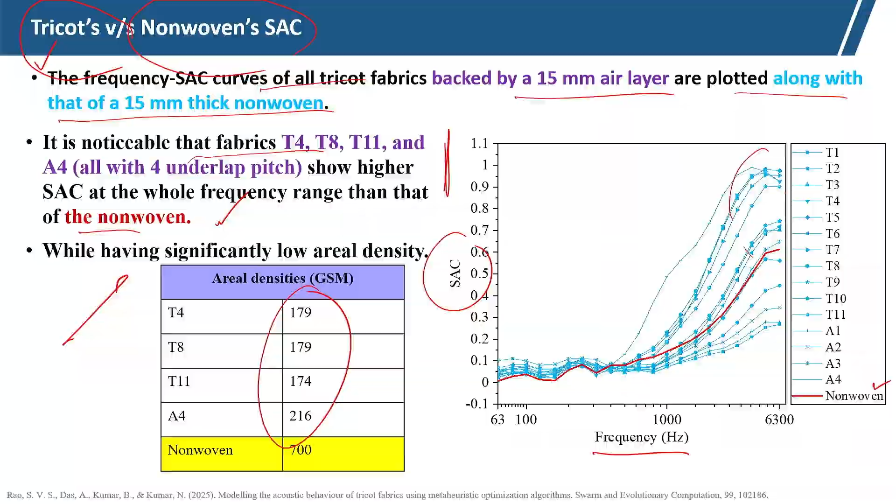Now, we are going to discuss one method which we have developed, and this instrument has been patented, which measures the acoustic behavior under real life situations. Normal measurement is done by the impedance tube method under laboratory conditions, but in real applications, industrial applications, automotive applications, sound absorption is required at high temperature and also under vibrating conditions. As we know, sound transmission is affected by temperature variation. So, this instrument will simulate the real life situation.

So, the limitation of the reverberant field method from an automotive perspective is that it requires a large sample, several square meters, which is impractical for many automotive components. Because in automotive components we need a smaller sample, but in the reverberant method we need a large sample, so that does not simulate the real life situation.

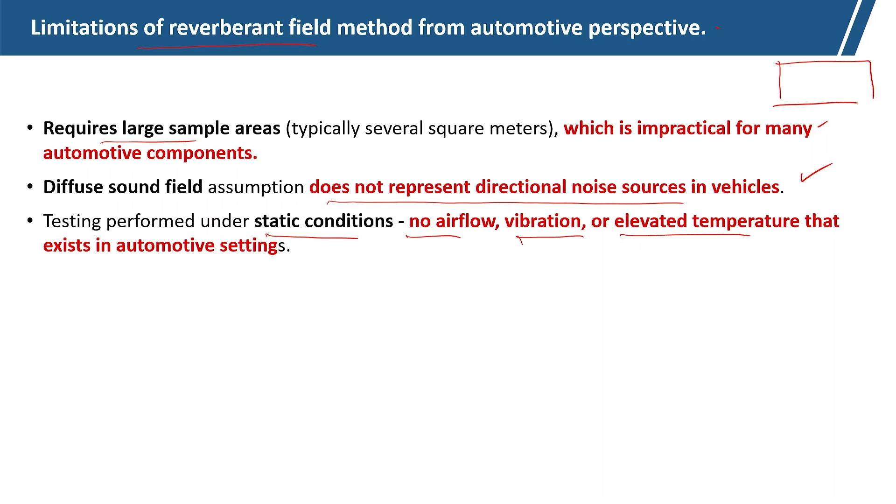The diffused sound field assumption does not represent the directional noise source in the vehicle. So, whatever sound source is there does not simulate the sound generated in the vehicle. Testing is performed under static conditions, with no airflow, no vibration, and normal temperature. In actual conditions, hot air flow will be there, vibration will be there, and the temperature will be very high, which exists in automotive settings.

And in the reverberant method, the flat mounting configuration is not suitable for duct-like automotive structures. Edge mounting or backing conditions can significantly influence the result. So, this reverberant technique, which is normally used for automotive acoustics, may not be suitable for specific applications, and it requires large facilities and high operational cost, limiting rapid material screening. So, if we want to test quickly, that is not possible.

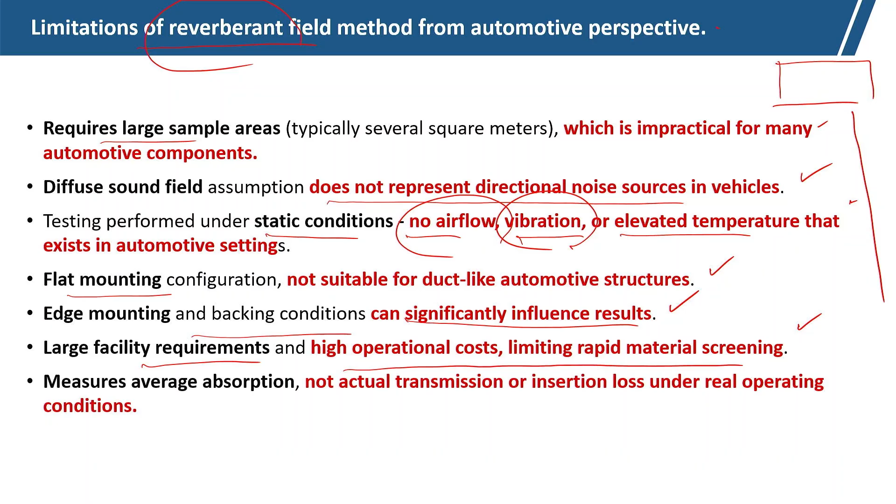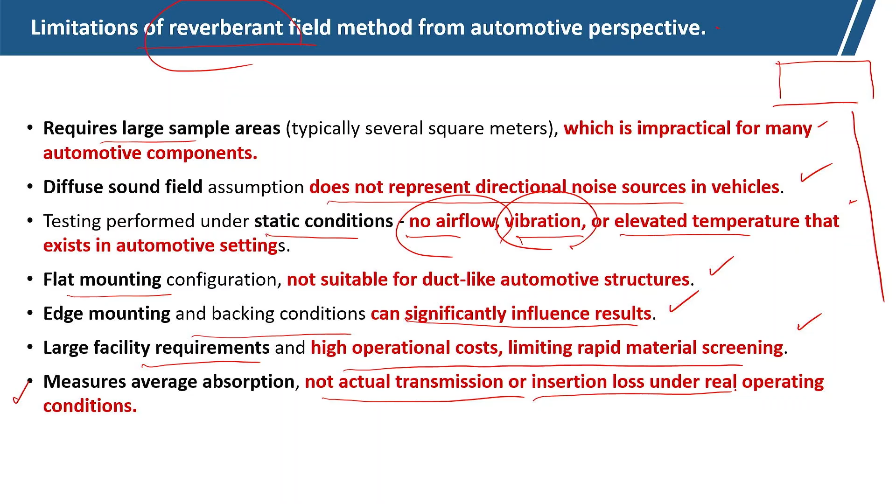The reverberant method measures the average absorption, not the actual transmission or insertion loss under simulated real operating conditions. So, combined acoustic and vibration interaction is important. Structural vibration from the engine, exhaust system and road excitation interacts with the acoustic wave, which influences sound attenuation. So, we have to combine the acoustic and vibration interaction.

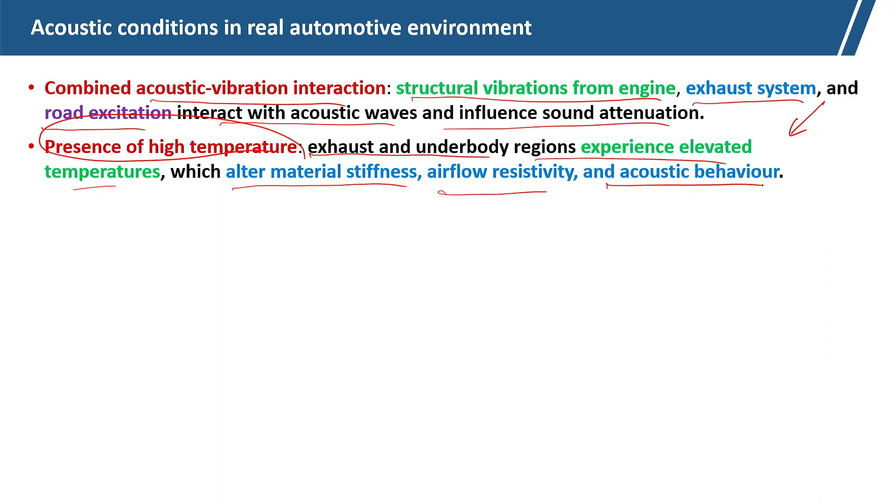And also at the automotive exhaust, high temperature is present. The exhaust and underbody region experience elevated temperature, which alters the material stiffness and the airflow; it will actually affect the airflow resistivity and also the acoustic behavior. Now, we can see this is the real life condition. Here the hot exhaust is going through the exhaust pipe, where the sound insulation characteristics may change with all this vibration and high temperature.

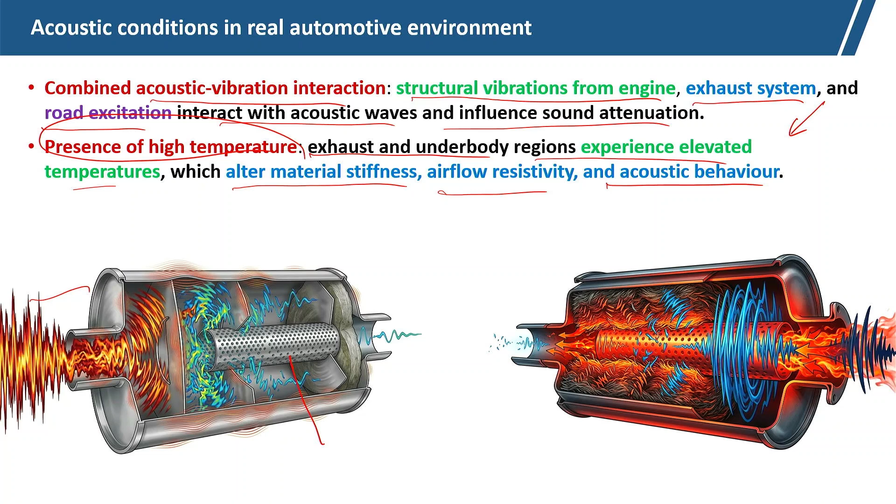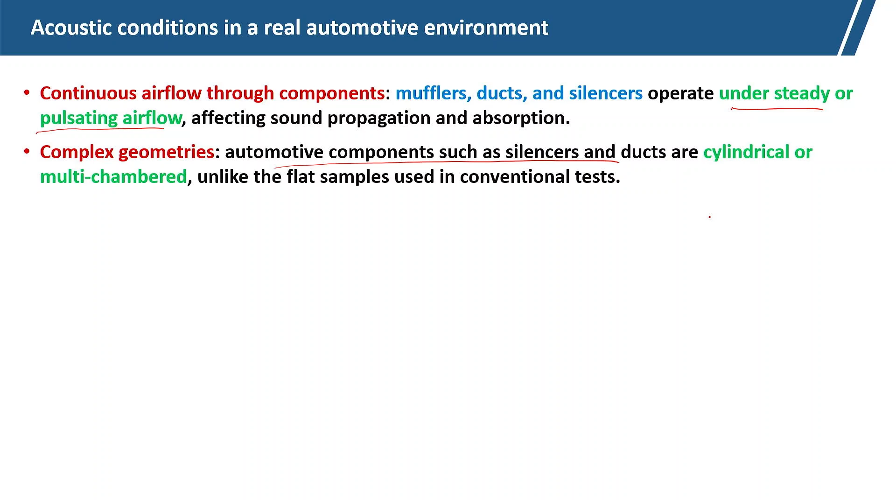So, there is continuous airflow through components like mufflers, ducts and silencers, which operate under steady or pulsating conditions, which affects sound propagation and absorption. Complex geometries are there; automotive components such as silencers and ducts are cylindrical or multi-chambered, not flat, unlike the flat sample tested under the conventional test.

Now, this is the type of exhaust, where you can see that the exhaust goes through this process, the sound wave penetrates and moves through this silencer, where we need to incorporate textile material for sound absorption and also heat absorption, so that the hot air does not actually go to the environment. As far as possible we have to reduce the heat flow.

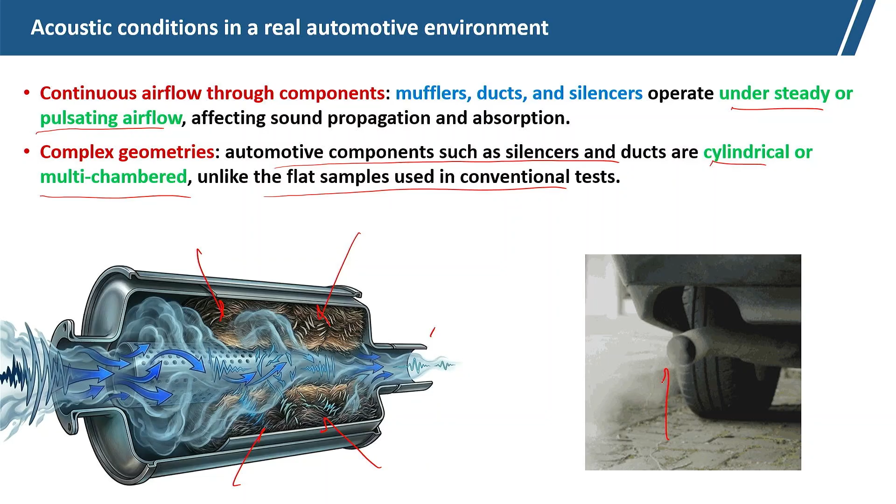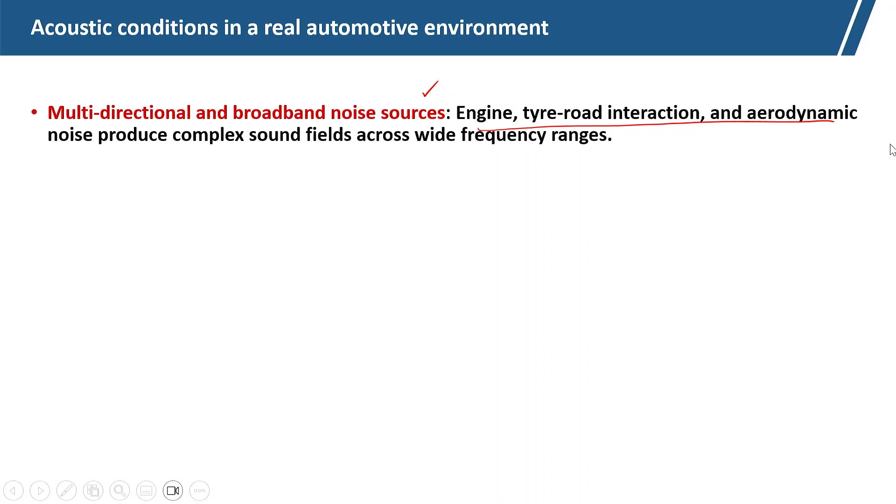So, a multi-directional broadband noise source is there, because of engine, tire-road interaction and aerodynamic noise. Complex noise at different frequency ranges will be created during the running of any automotive, coupled with thermal interaction. So, thermoacoustic behavior is very important. Dynamic operating conditions are required, like simultaneous acoustic loading, vibration, airflow and temperature fluctuation. Everything happens in the real life condition, but it is not replicated in standard tests in the conventional test laboratory.

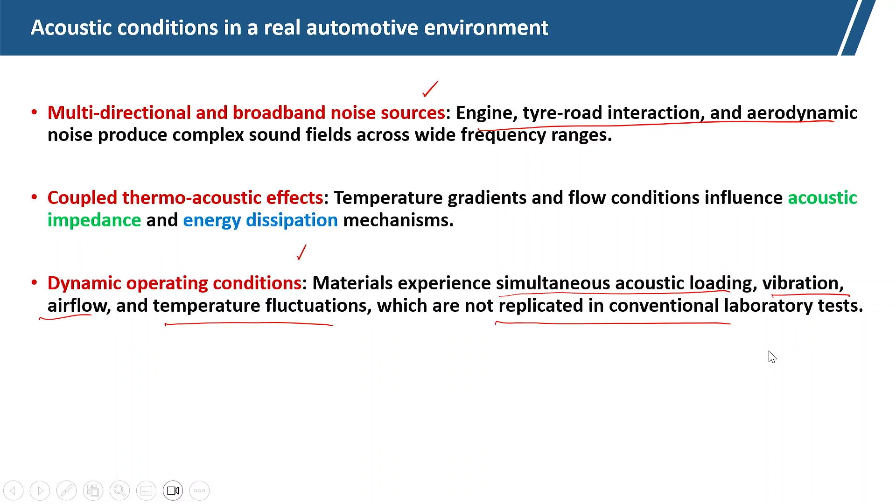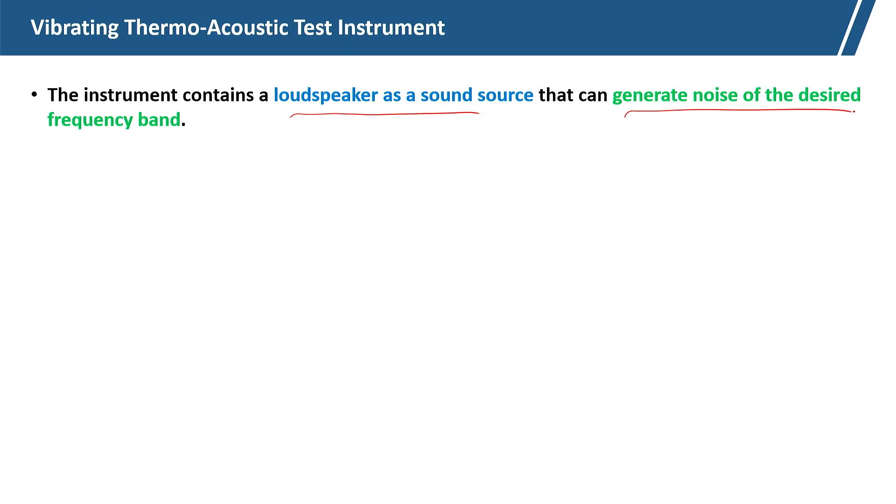The instrument contains a loudspeaker as a sound source that can generate noise of the desired frequency. We can change the frequency of the noise. The inlet pipe is there. Another pipe is attached diagonally to allow the air flow towards the outlet at the desired speed. So, we can control the speed of the air.

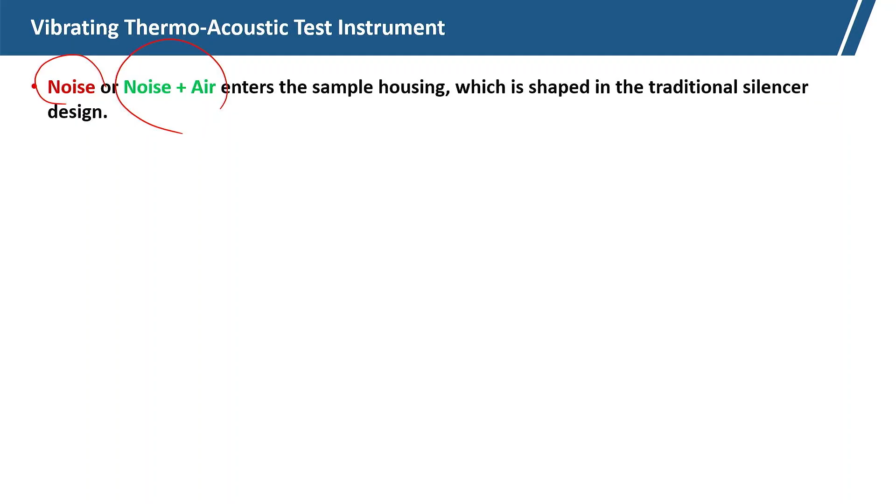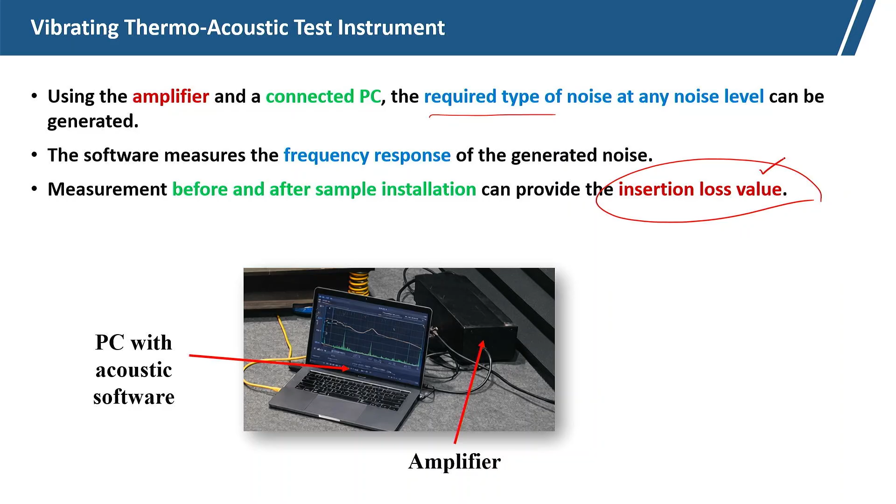So, using the amplifier and connected PC, which is required to generate the noise and measure the noise level, and software measures the frequency response of the generated noise before and after the sample is installed, which can be used to measure the insertion loss. So, this is overall the system which has been developed.

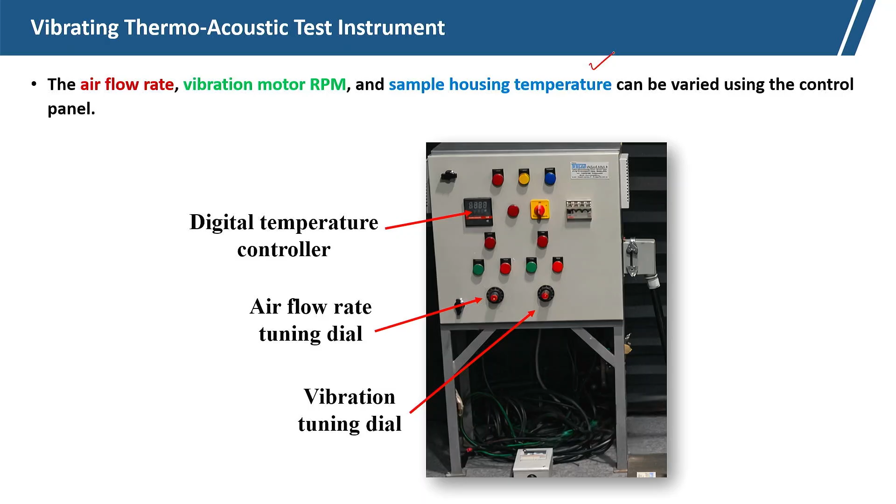The insertion loss DI can be calculated, where DI equals LWII minus LWI. So, LW1 is the level of sound power within the experimental frequency band and propagated along the tailpipe when the test object is installed.

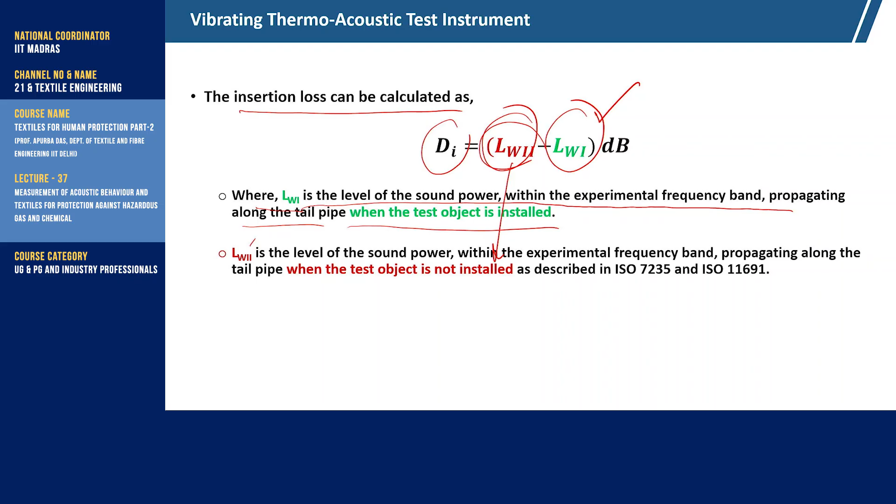This is the test object. With the test object and without test object: this is with the test object, and without test object this one is there, LW11. Okay. So, the difference of these two will show the sound transmission loss.

So, here we are completing this module of protecting us from the noise pollution. We have discussed all the issues related to noise and how noise pollution affects human health, and also we have seen the different types of textile structure to control the sound pollution, and finally we have tried to understand the noise reduction in a complex situation like automotive.

Now, we will start the next module 9, which is textiles for protection against hazardous gas and chemical. This is a very important area. So, in many situations like an industrial setup, we get exposed to hazardous gases or chemicals. So, how textiles help us in protecting from these hazardous gases or chemicals. First, we will try to understand the different types of gas or chemical related hazards.

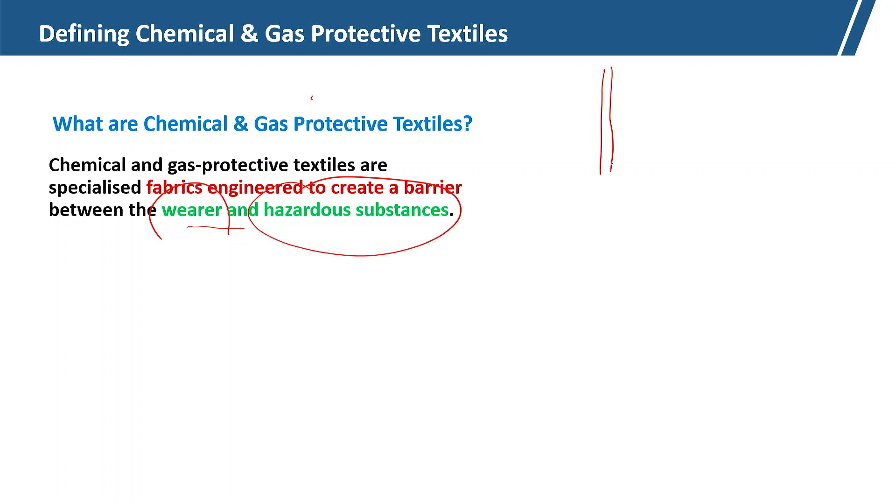So, protective textiles for chemical and gas hazards are basically advanced fabric technology which safeguards us from all these environmental hazards. So, chemical and gas protective textiles can be defined as the protective textiles which safeguard us from hazardous substances like gas and chemicals, and these are engineered protective textiles to create the barrier between the wearer and the hazardous substances. So, this textile will act as a barrier.

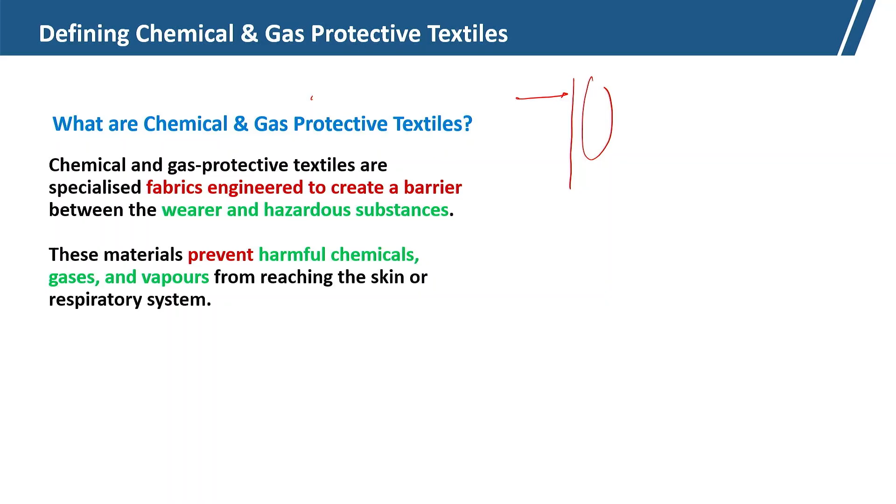So, these materials prevent harmful chemicals, gases or vapors from reaching our skin. Okay. This type of barrier material is required. So, the scope of this type of material is from single use garments to multi-layered protective suits, incorporating advanced polymer science, laminates, or membrane technology.

So, multi-speciality, multi-dimensional inputs should be there, and at the same time this type of textile should be breathable, okay, but ensuring impermeability to the dangerous agents. So, it should be breathable, but it should be impermeable to the dangerous agents.

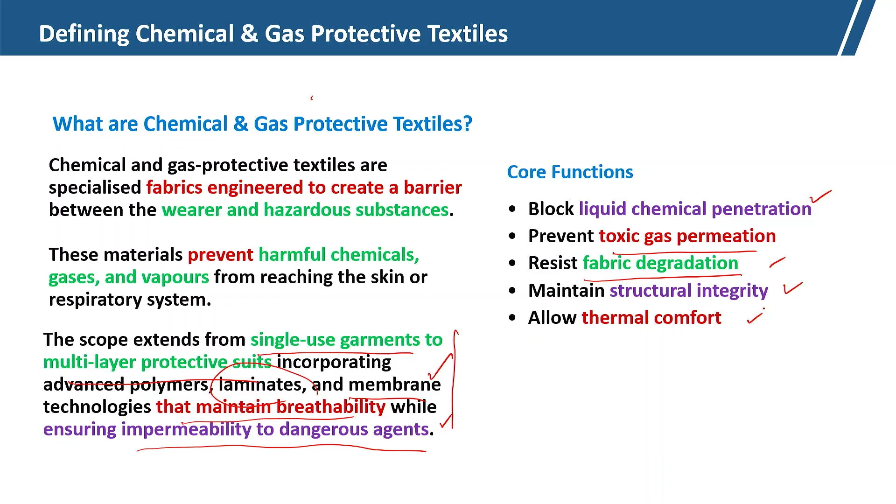So, core functions of this: it should block liquid chemicals from penetration, it should prevent toxic gas permeation, it should resist fabric degradation, because if the fabric degrades when it comes in contact with the chemical, then the protection will be lost. So, it should resist degradation so that it maintains its structural integrity during use. It should allow thermal comfort; heat and mass transmission should be there, so that the wearer feels comfortable and performs better.

So, why does the protection matter? For industrial safety. Workers face different types of risk during production, handling or maintaining the total system, or during maintenance operations also. So, they are exposed to different types of chemicals and gases. So, for industrial safety we need this type of protective textiles.

For emergency response also, like first responders confront. That is where there will be unpredictable chemicals which will be released. So, in these types of cases we need protective textiles, and also in healthcare settings. Medical personnel need protection from different infectious agents and pharmaceutical compounds. So, for all this we need protection.

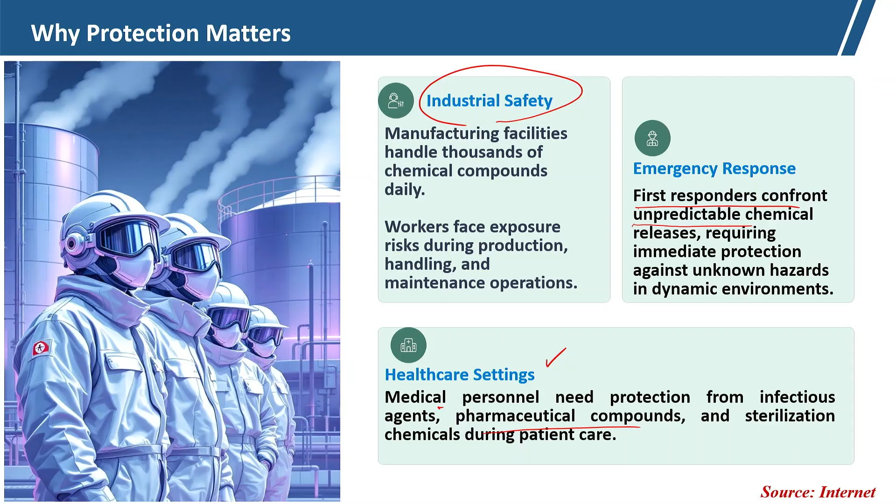So, chemical hazards: let us see what type of chemical hazards we normally face, so that accordingly we can protect ourselves. If we understand the hazard, then we can protect ourselves. So, acidic substances are there which are corrosive in nature, different types of acids like hydrochloric acid, sulfuric acid, nitric acid. These chemicals are corrosive in nature. So, the fabric is required to protect us from this type of acidic substance. Likewise, alkaline compounds are there.

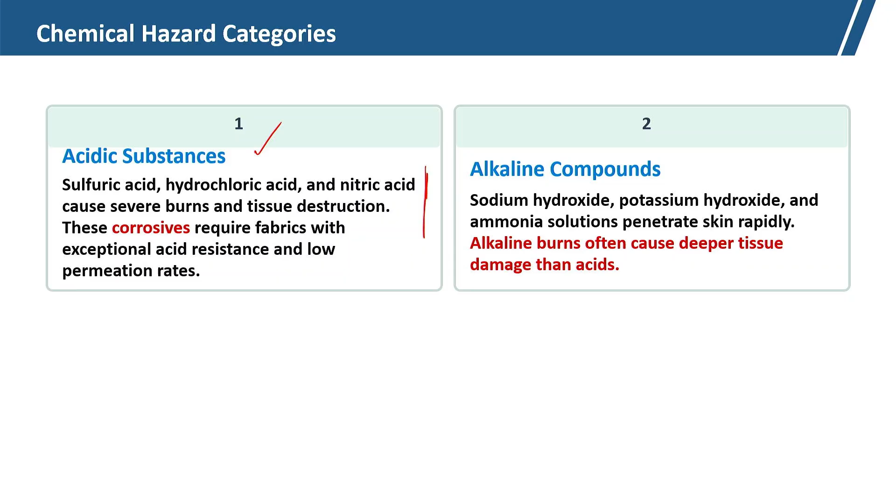Alkaline burns often cause deeper tissue damage than acid. So, alkaline burns basically go deep, and we have to protect ourselves from these alkaline compounds. Oxidizing agents are there. They react violently with organic materials, including the skin, like hydrogen peroxide and chlorine. So, we should protect ourselves from this type of chemical hazard by using protective textiles. And organic solvents: there are different types of organic solvents that easily penetrate our skin. So, we should protect ourselves from all these hazardous chemicals.

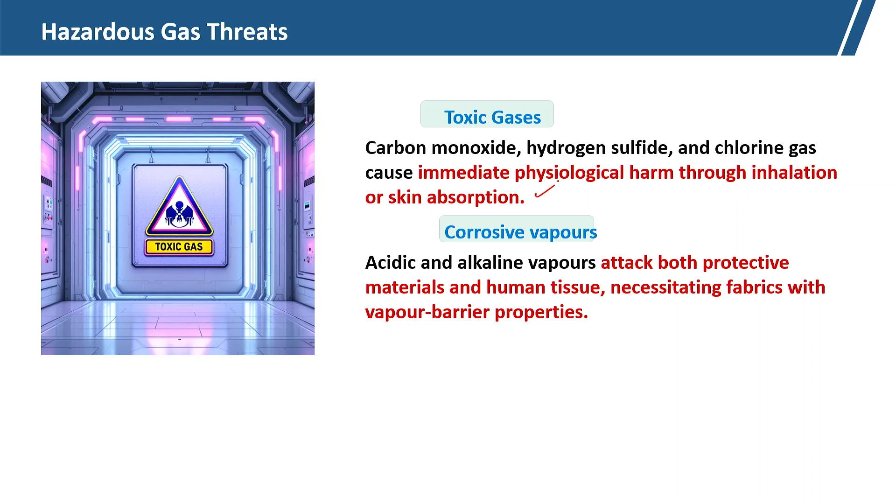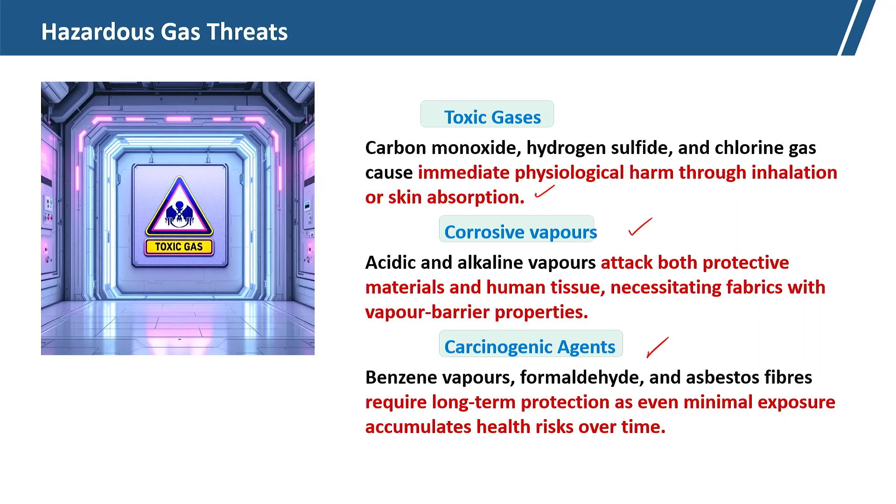Now, there are hazardous gas threats also, different types of hazardous gas like toxic gas. It can be inhaled easily or absorbed through the skin. Corrosive vapors are there. Then carcinogenic agents. So, these different types of gases are generated.

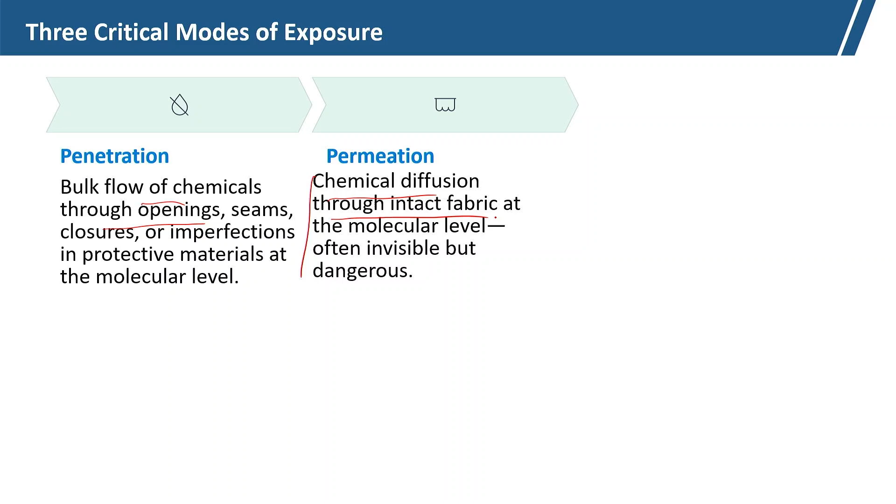So, the three main critical modes of exposure: penetration is one way of exposure. The bulk flow of chemical through the openings of the fabric or seams, that is penetration. Second is permeation. Chemicals diffuse through the fiber or through the fabric, and here the important thing is that the breakthrough time is critical for the safety rating. So, if permeation is there, we should judge the breakthrough time, that means the time required for permeation; that is very important.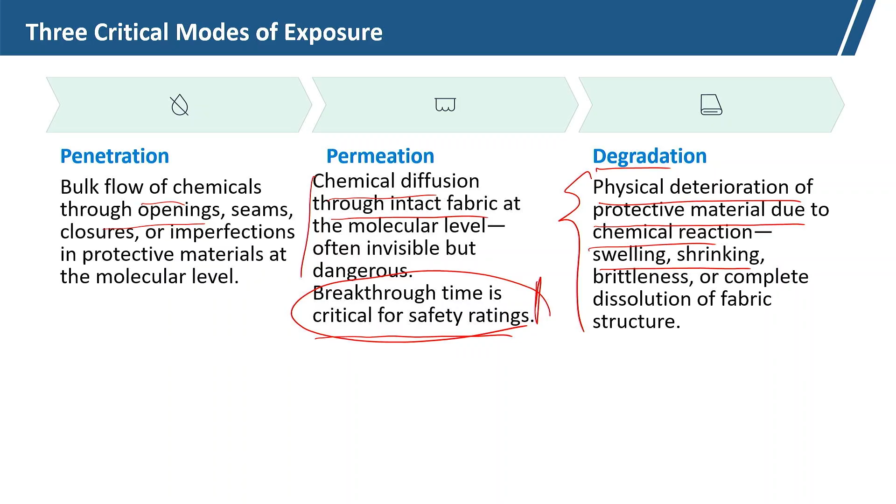And then degradation: the chemicals may degrade the barrier, the textile material. Physical degradation of protective materials due to chemical reaction will be there, like swelling, shrinking, brittleness, or complete dissolution of the fabric. So, if it degrades, then the person will be exposed directly to the chemical. To develop protective textiles, we should understand these mechanisms, penetration, permeation and degradation, to protect ourselves by design and material selection.

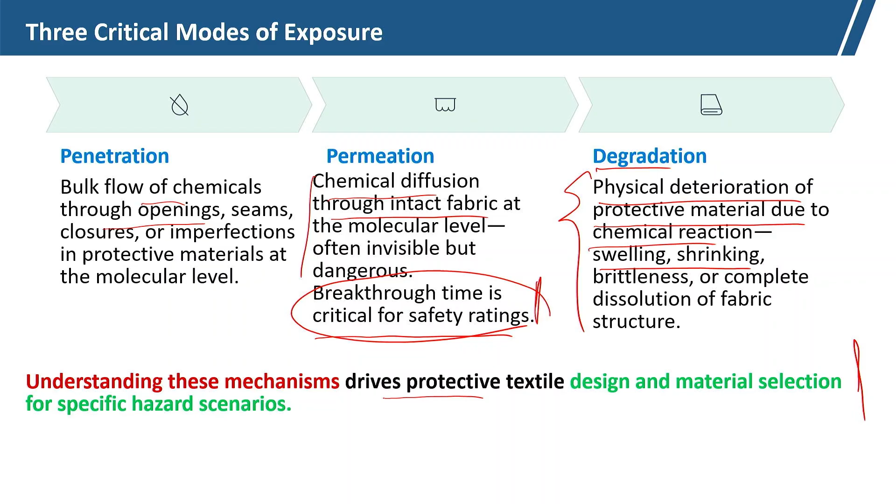Okay. So, the critical modes of exposure are penetration, permeation and degradation, and if we understand these mechanisms and the interaction with the material, then we can protect ourselves. We can develop our required textiles. So, advanced fabric technologies are needed. If we are expecting this type of multi-threat, a single layer system will not work. We have to go for a multi-layer system with selective permeability.

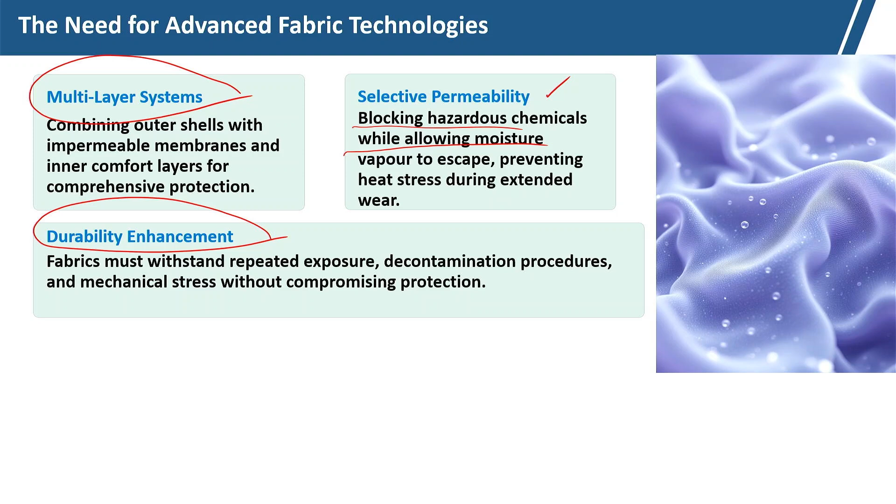So, what does it mean? It should prevent or block hazardous chemicals from entering our body, but at the same time it should allow moisture vapor to escape to reduce our heat stress. Okay. Selective permeability is required. Then in the fabric, durability enhancement should be there. After exposure to chemicals and gas, the material should not get degraded.

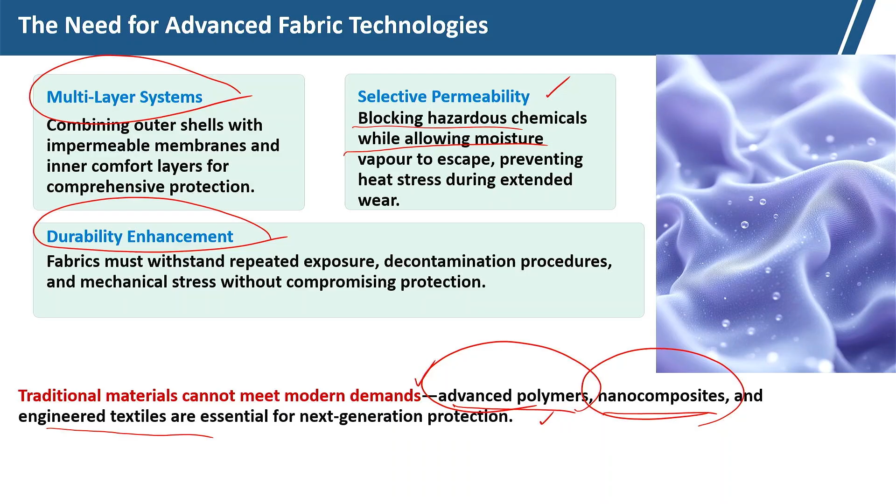Traditional materials cannot meet modern demands. That is why advanced polymers, nanocomposites and engineered textiles are essential for new generation protection. So, we have to use advanced polymers, develop the required nanocomposites, and engineer the textile materials to protect us from hazardous gases or chemicals.

So, ergonomics is also important. Proper design will enhance the performance of a person who is wearing this type of protective garment. Even the most protective fabric fails if the wearer cannot perform their task or removes the gear to get rid of the heat stress. So, ergonomic balance is required. By weight reduction, we should have clothing with a lighter weight. Mobility enhancement: the person should be able to move freely.

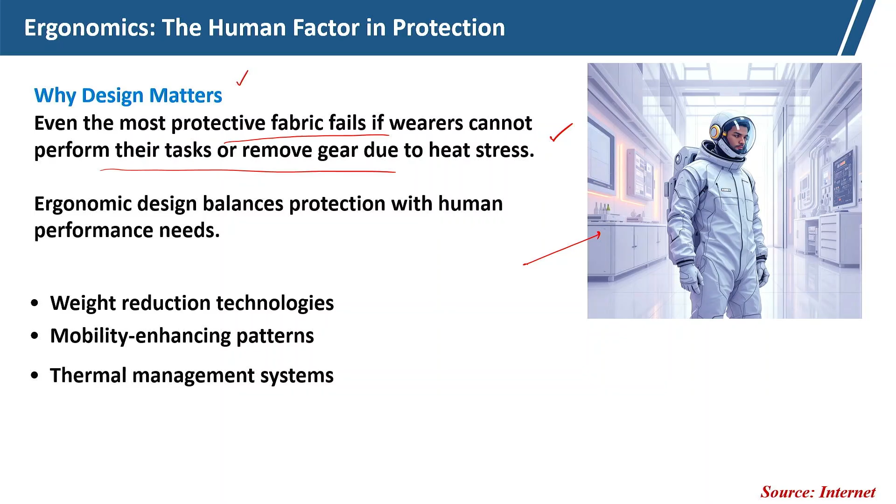Thermal management: it should actually be able to transmit the heat and moisture from the body. Proper thermal management, so comfort enhancement should be there, and that is why the extended wear comfort. So, the person should feel comfortable for a long time; only then will he be able to perform.

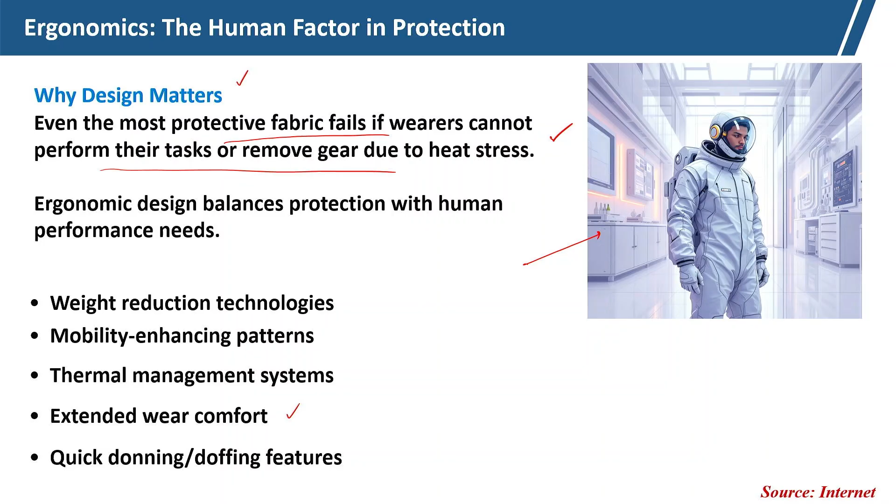And quick donning and doffing. So, the design should be such that it should not take a long time for wear, donning or doffing. If we want to remove it, it should be removed quickly. So, these design aspects should be taken into consideration.

So, there are different regulatory standards like the NFPA standard. So, National Fire Protection Association, their guidelines for emergency response protective clothing and equipment. OSHA guidelines, Occupational Safety and Health Administration guidelines, that mandate workplace chemical protection and hazard assessment protocols.

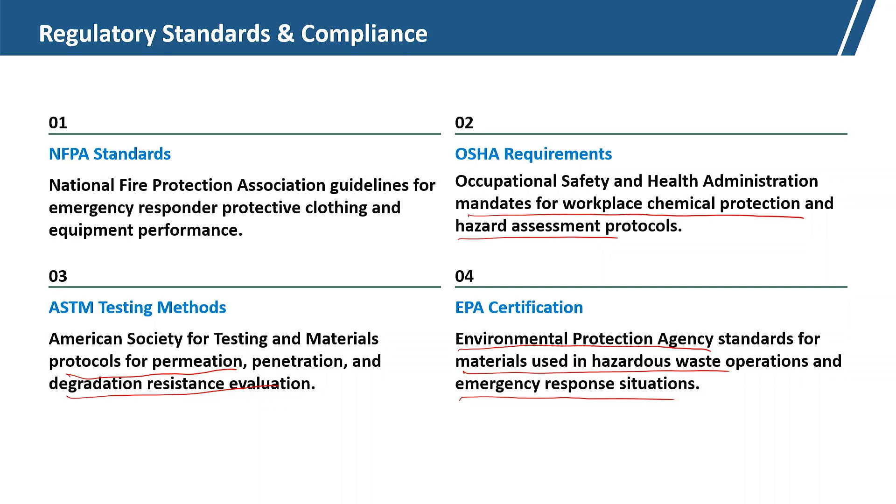There are ASTM guidelines also, which deal with the testing protocols for permeation, penetration and degradation resistance of materials, and EPA certification, Environmental Protection Agency, for materials used in hazardous waste operations or emergency response situations. So, during development or production, one has to follow these types of standards. Compliance is required.

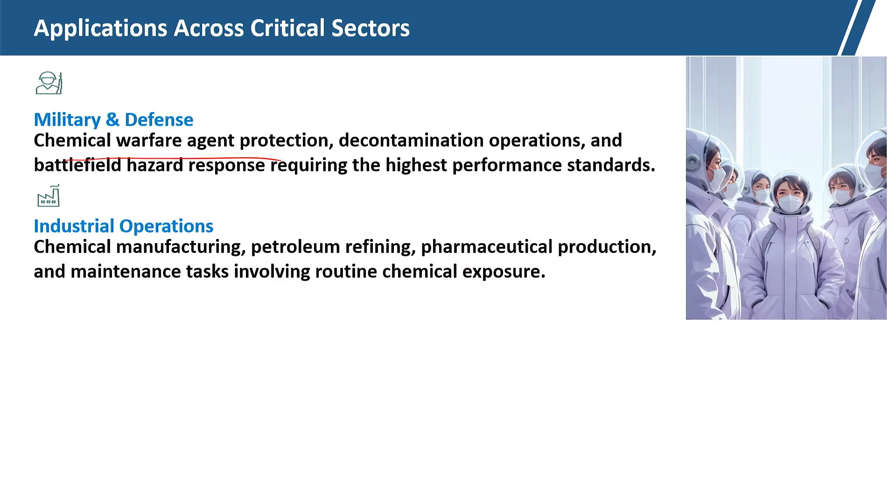So, there are different critical sectors where people get exposed to hazardous gases and chemicals. These are the military and defense area: textiles should protect us from chemical warfare agents. Then industrial operations, where people deal with hazardous chemicals, like petroleum refining and pharmaceutical production.

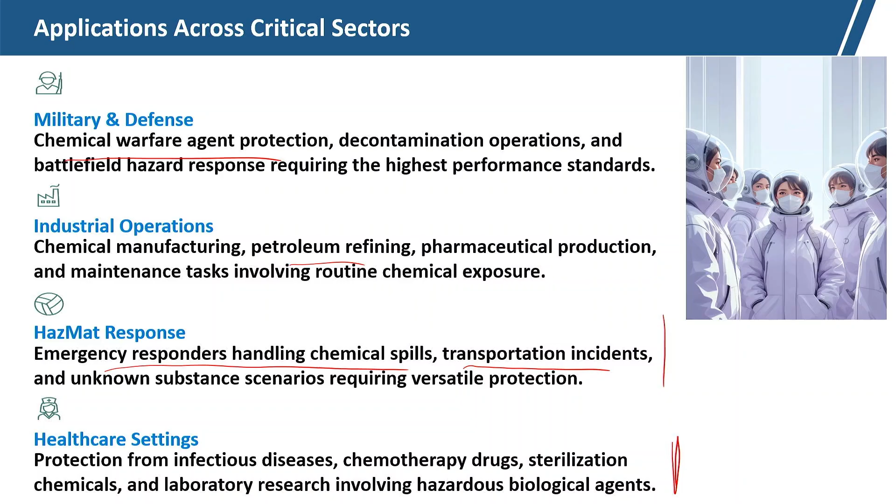And hazmat response, emergency response for handling chemical spills, any transportation incidents, different types of situations where we need this type of protective textiles, and even in the healthcare sector, where people are exposed to different types of chemicals, drugs and infectious diseases. Protection from biological threats we will discuss separately.

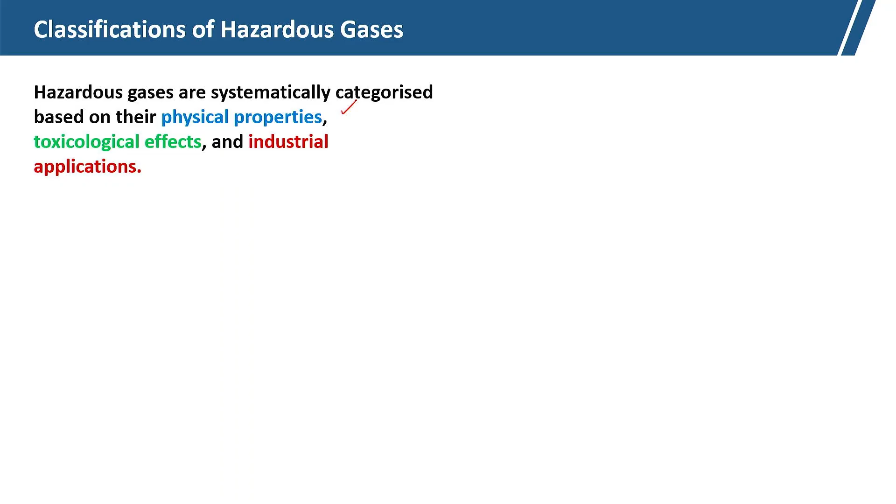So, let us try to understand the basic chemistry of some common hazardous gases and chemicals. Understanding this chemistry is very important to develop and engineer the PPE, to develop the protective material. So, classification of hazardous gases: the gases are classified based on their physical properties, toxicological effect and industrial application.

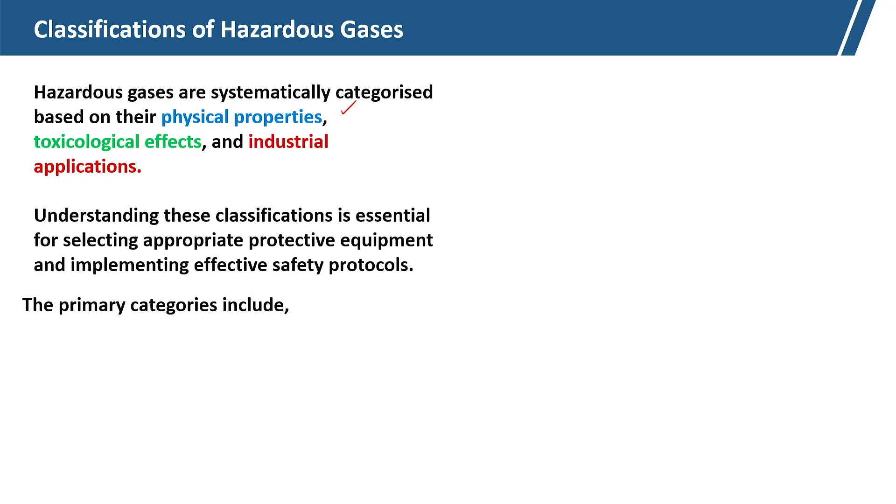So, primary categories include the corrosive agents. These corrosive agents damage our tissues when they come into contact with our skin, like acids, bases, oxidizing agents. Asphyxiants are agents that displace the oxygen and inhibit cellular respiration, generating respiration problems, like carbon dioxide, nitrogen.

And neurotoxins, chemicals which affect the nervous system, and irritants, which cause inflammation of the respiratory tissues. So, these are broad classifications of hazardous gases. To protect ourselves from these gases, we must know their chemistry, so that the reaction with the textile material is established.

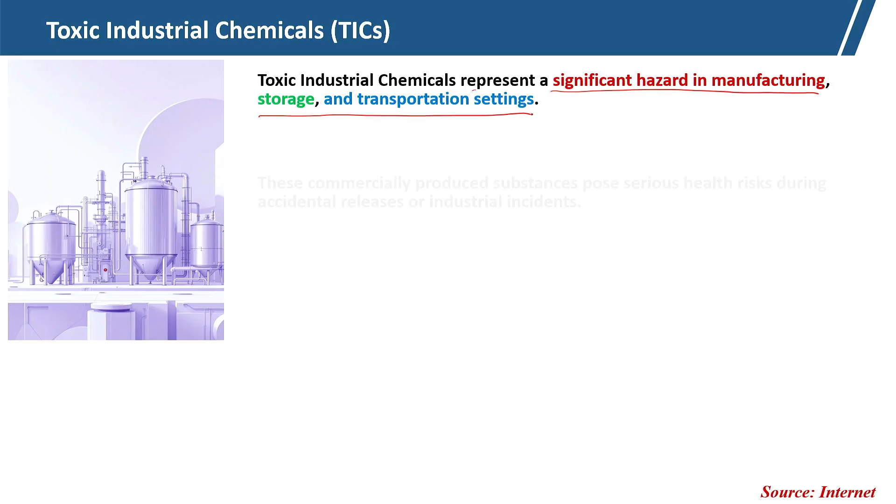Toxic industrial chemicals represent a significant hazard in manufacturing, storage and transportation. These are basically high volume toxic industrial gases like chlorine, ammonia, sulfur dioxide. Chlorine is used for water treatment, ammonia for fertilizer and refrigeration, sulfur dioxide for paper manufacturing. During transportation and storage, people may get exposed to these toxic industrial chemicals.

Exposure pathways are through inhalation and dermal absorption, when it comes into touch with this type of chemical. And the protection priorities: respiratory protection is critical, and full encapsulation for high concentrations.

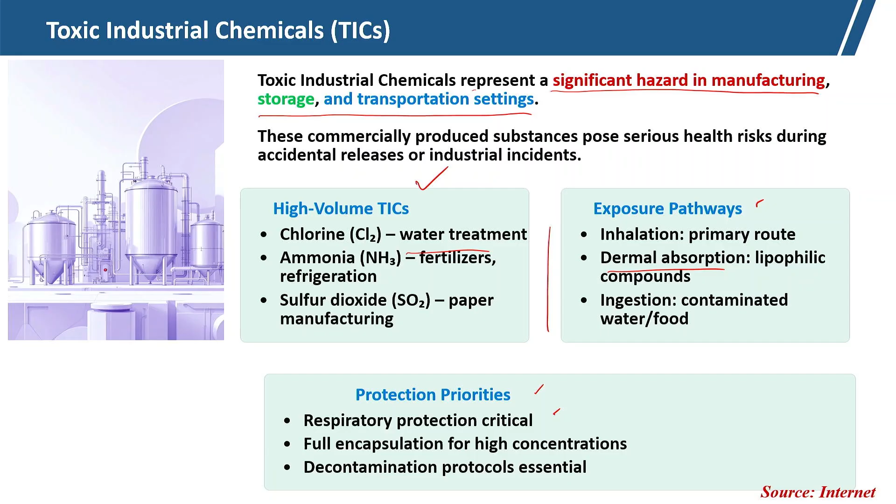Chemical warfare agents are also there, deliberately designed to maximize toxicity. We have to protect ourselves from these chemical warfare agents by designing proper protective equipment, so that there is no direct exposure. So, nerve agents are there, like the G series

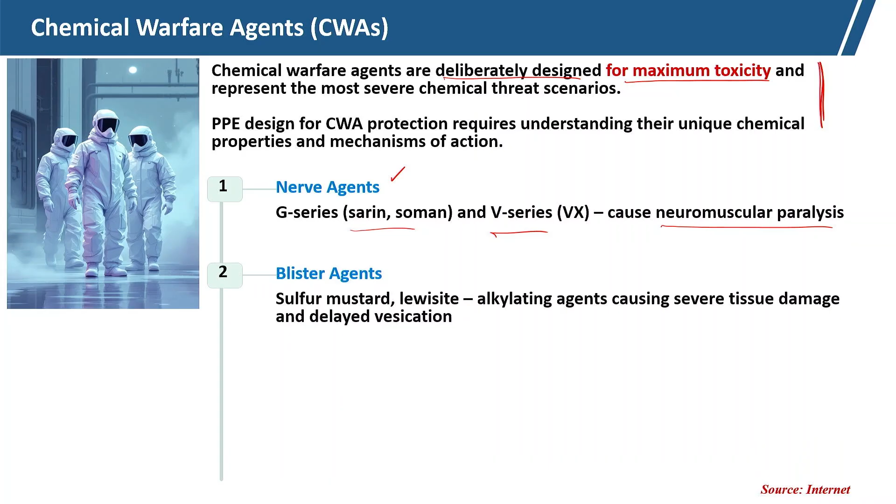or V series, which cause neuromuscular paralysis. These are deliberately created for chemical warfare, but definitely they are going to affect us. So, nerve agents, blister agents, blood agents like hydrogen cyanide, and choking agents; all these are chemical warfare agents. We should protect ourselves from them, although they have been deliberately designed for some purpose.

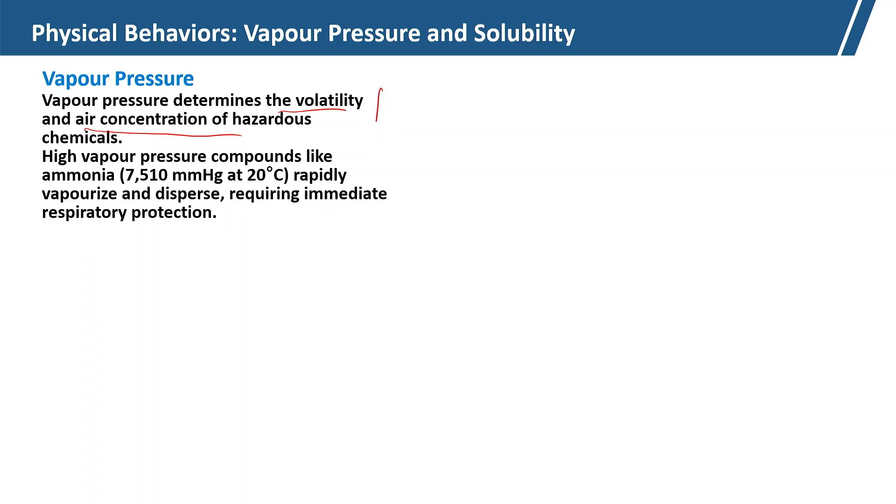Now, physical behavior: vapor pressure and solubility. We should determine the vapor pressure, which determines the volatility and air concentration of a hazardous chemical. There will be high vapor pressure compounds like ammonia, and even low vapor pressure compounds like VX. So understanding the vapor pressure is critical for selecting the appropriate PPE and predicting the contamination during the operation, and the contamination duration also has to be predicted. So understanding the vapor pressure is very critical.

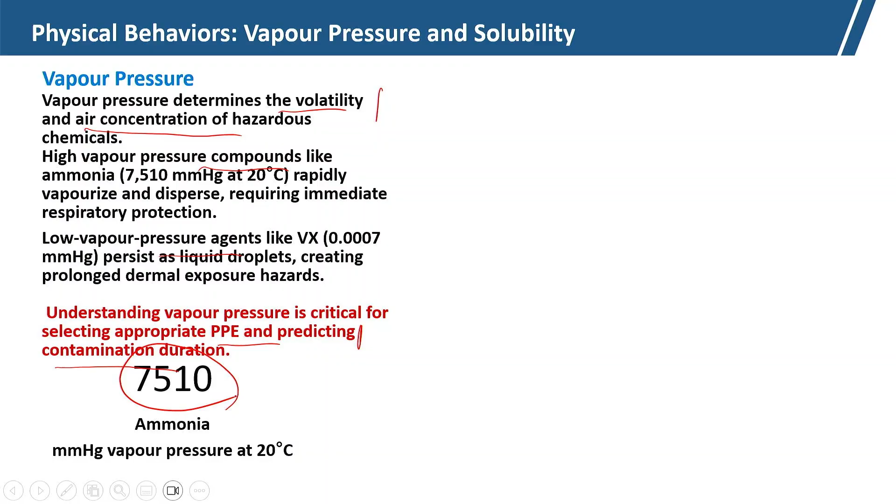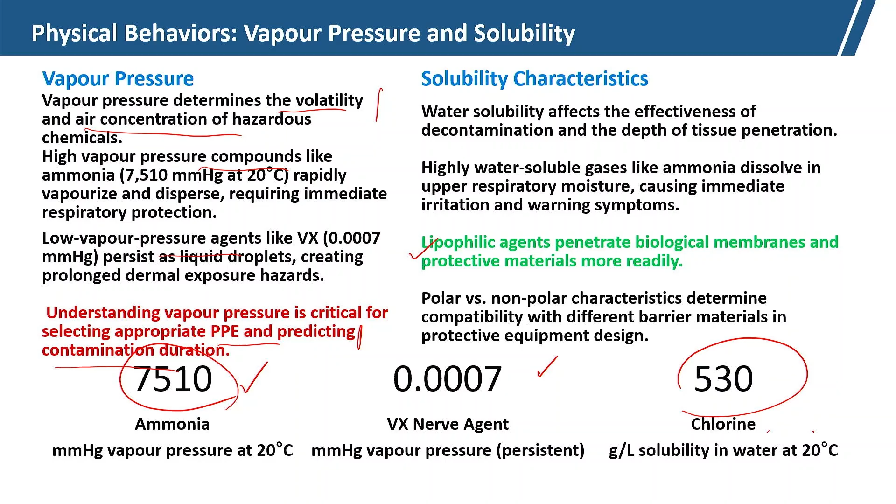We can see that for ammonia the vapor pressure is 7500 mmHg at 20 degrees Celsius, and for VX nerve agent the vapor pressure is low, 0.0007 mmHg. Ammonia has high vapor pressure and VX low, different types of vapor. So we must understand this vapor pressure, and solubility is also important; the water solubility effect is important. You can see that this is 530 grams per liter solubility for chlorine. So different chemicals have different solubility.

The chemical or gas diffuses through the textile material. Any porous material, or even non-porous material with some small micropores, gets diffused through. So we must understand the diffusion mechanism through protective textiles. It follows Fick's law. First is dissolution: the gas molecules dissolve into the polymer surface based on the solubility coefficient and partial vapor pressure. Then permeation: due to the vapor pressure difference, the dissolved molecules migrate through the polymer matrix via random molecular motion and free volumes. And desorption: when it penetrates and reaches the other surface, it exits from the opposite surface into the environment.

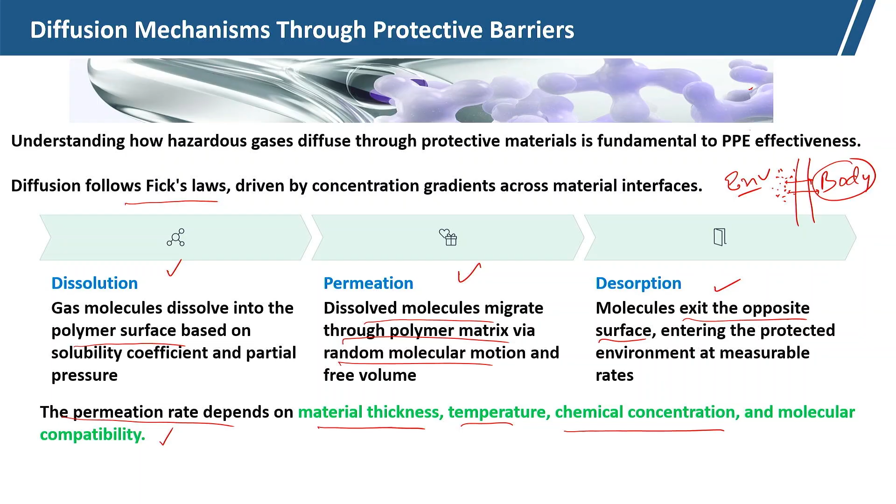In the case of protective textiles, this is our human body, the environment, and the gas or chemicals are there; they will diffuse towards the body. So we have to design our clothing to prevent all this penetration. The permeation rate depends on the material thickness, temperature, chemical concentration and molecular compatibility. We can control the permeation rate by changing the material characteristics. And the breakthrough time, when the hazardous concentration reaches the wearer, is the critical safety parameter. The time taken for these chemicals to reach is called breakthrough time.

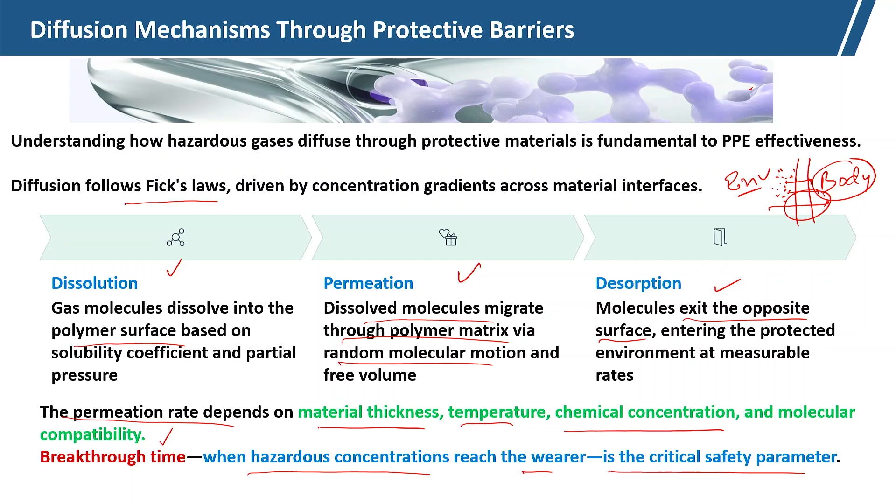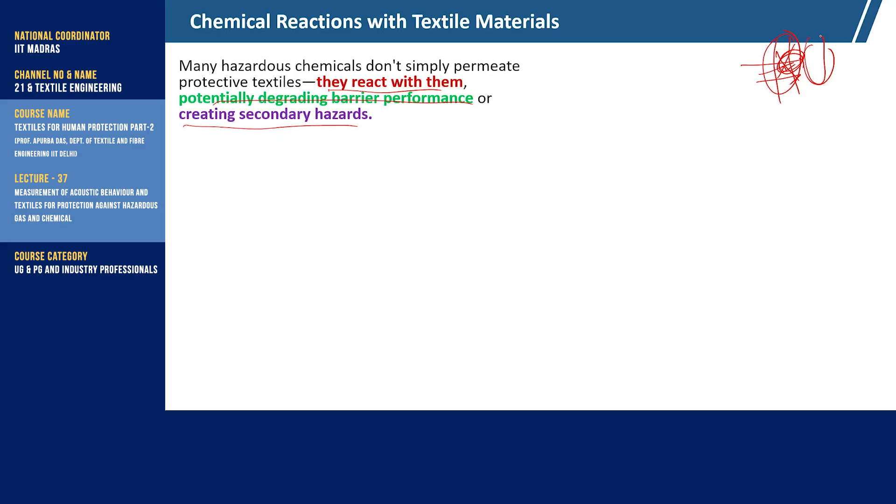We must also be very clear about the chemical reaction with different textile materials; if it reacts and degrades the material, then it will be of no use. Many hazardous chemicals do not simply permeate through the textile material. Permeation is one problem, but they may react with them and potentially damage the barrier performance, and that will create a secondary hazard. The reacted substance may affect our body. So there should not be any chemical reaction. Reaction may damage the protective textile, or generate a secondary chemical that may be harmful, hazardous.

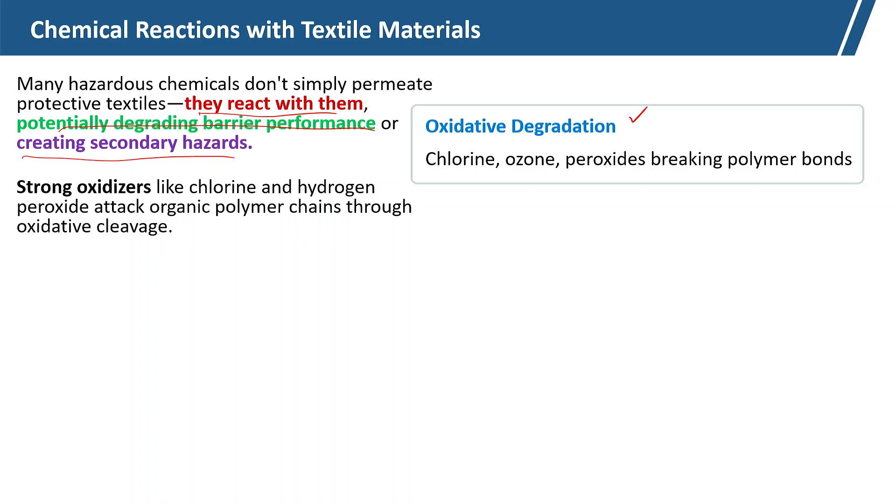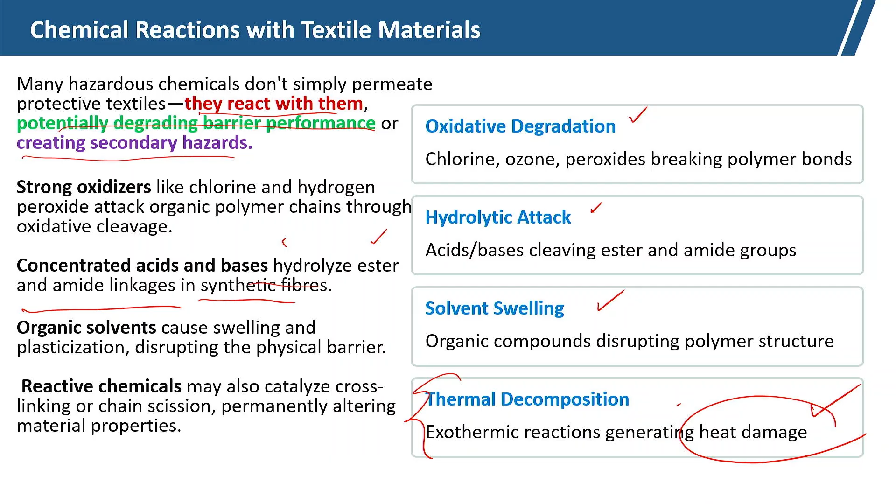Chemical reactions like oxidative reactions from chlorine, ozone, peroxide; hydrolytic attacks, where concentrated acids or bases hydrolyze the ester or amide linkages in synthetic fibers, we have to take into account. With organic solvents, solvent swelling will take place. Thermal decomposition we already discussed in extreme heat protective textiles. Here, during the reaction of the chemical with the textile material, they generate heat, an exothermic reaction, and that may be harmful, and there are different reactive chemicals.

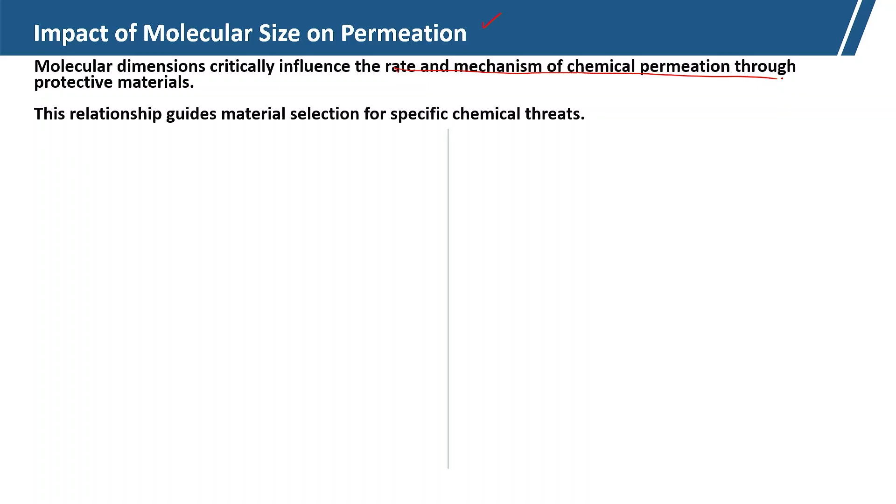Now, impact of molecular size on permeation. Molecular size has significant impact on the rate and mechanism of chemical permeation through protective textiles. Small molecules like hydrogen cyanide, hydrogen sulfide and formaldehyde readily diffuse through most polymers due to their smaller size. For medium size, 100 to 300 Da, standard chemical protective clothing will provide protection, and large molecules permeate slowly due to steric hindrance. So depending on molecular size, permeation will vary, and smaller molecular size chemicals are more dangerous.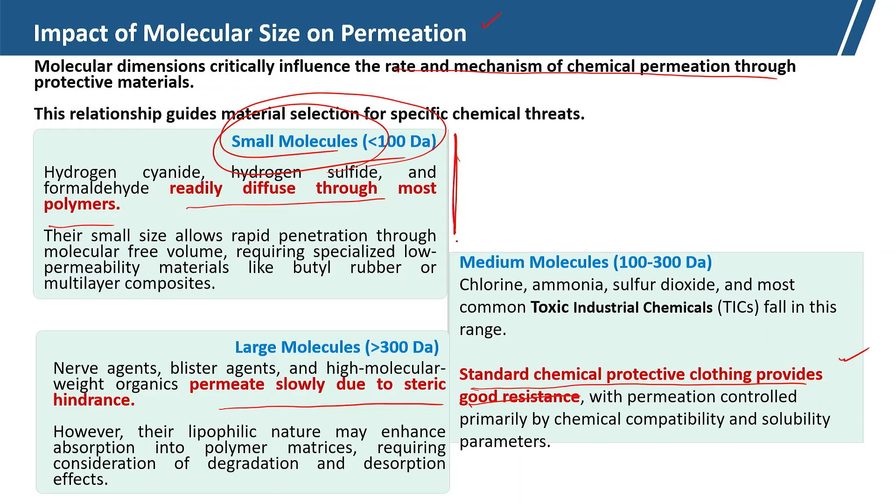So, vapor or gas interaction with the polymers: if vapor or gas comes, the sorption, diffusion and desorption process will be there.

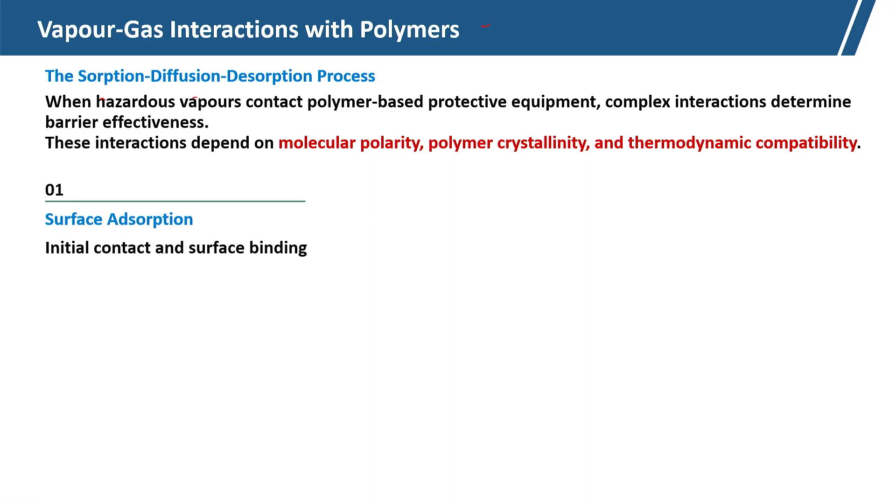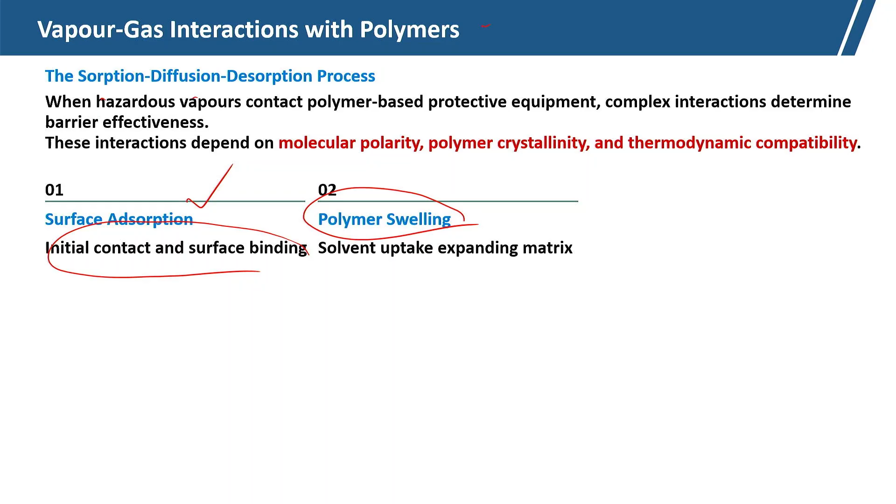So here some vapor is coming in - this is the outer surface and this is the inner surface. First there is surface adsorption, then the polymer gets swelled, then molecular diffusion takes place inside, and then it reaches the inner surface and affects the body.

So we should create different types of textile materials - polar polymers, non-polar polymers - to resist this, like neoprene, polyethylene, which show opposite selectivity. So different types of protective textiles we should use, with equilibrium and saturation, and steady state permeation rate created.

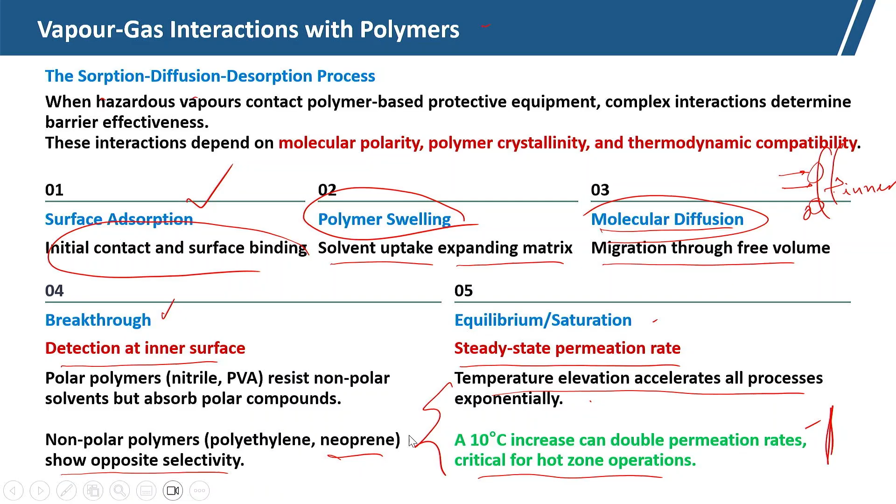Gas adsorption and chemical degradation activity in activated carbon - if we use activated carbon, respiratory protection against hazardous gases lies in two primary mechanisms. One is physical adsorption onto high surface area media - activated carbon physically adsorbs the gas or chemicals - and then chemical degradation through catalytic or reactive impregnants.

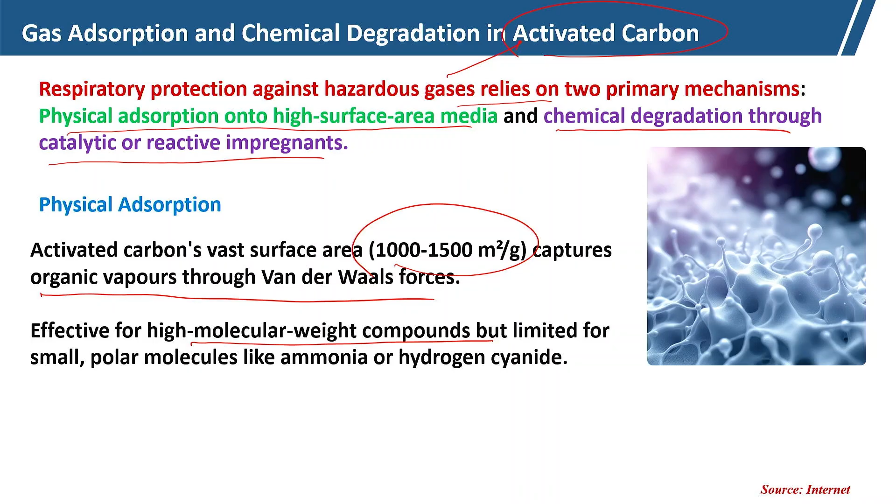Physical adsorption - activated carbon's vast surface area, which is very high, about 1000 to 1500 square meters per gram, captures organic vapors through van der Waals forces. It is effective for high molecular weight compounds, but limited for smaller and polar molecules.

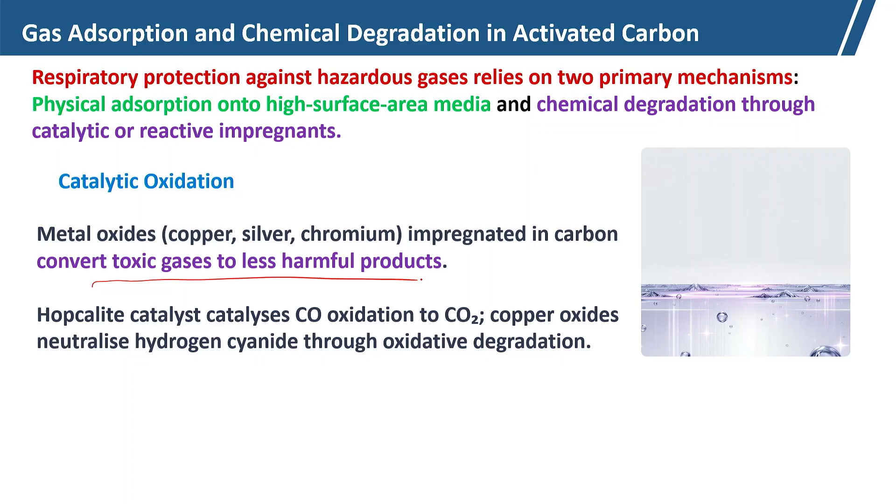Then chemical degradation will be there - first adsorption, then chemical degradation by catalytic oxidation, which converts toxic gases to less harmful products. Then chemical neutralization - the reactive impregnant chemically binds and decomposes specific threats. There are different types of reactions.

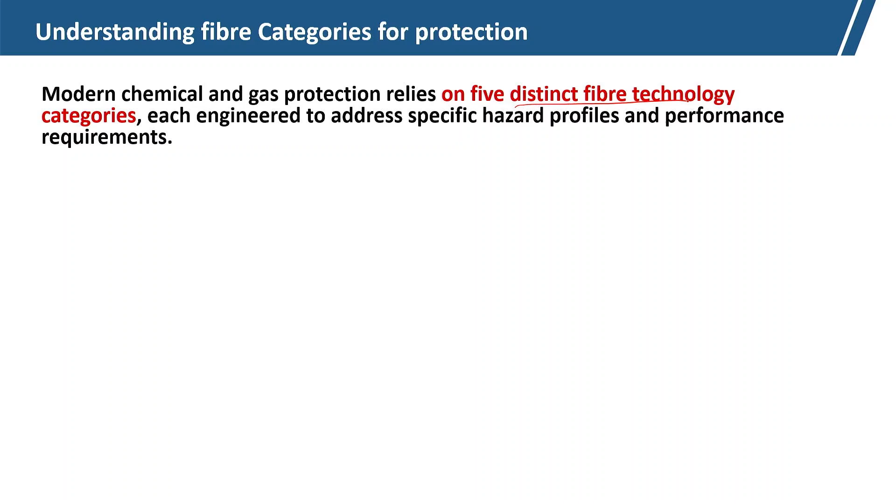Then we have different types of textile fibers used in gas and chemical protection, commonly used in advanced fiber technology for safeguarding workers from hazardous chemicals. Modern chemical and gas protective textiles rely on 5 distinct fiber technologies. The categories are: inherent barriers - fibers with built-in molecular resistance to chemical and heat.

We can have coated materials which act as a barrier - base fabrics enhanced with an elastomeric barrier layer. So the base fabric is there, and the elastomeric coating enhances the barrier performance.

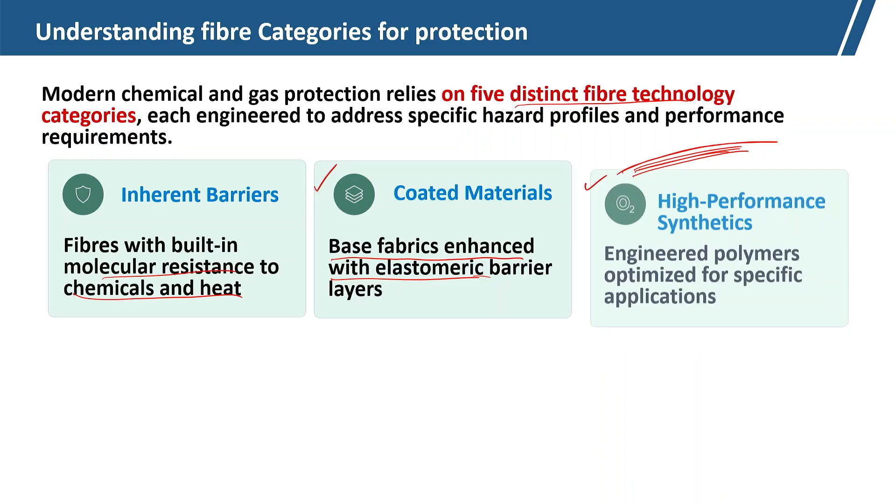High performance synthetic fibers are used - engineered polymers for specific applications. Novel high technology like cutting-edge materials incorporating nanotechnology can be used. Then performance properties - critical characteristics that determine effectiveness. So we should take care of all these developments: inherent barrier, coated material, high performance synthetic fibers, novel technology like nanotechnology, and critical characterization.

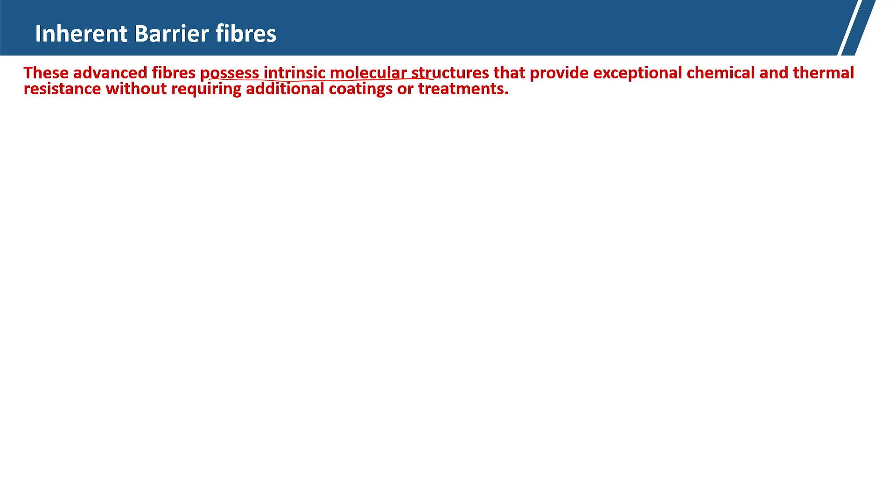Inherent barrier fibers use advanced fiber processing - the intrinsic molecular structure provides exceptional chemical and thermal resistance. These are basically aramid fibers, like meta-aramid and para-aramid. Meta-aramid has excellent flame resistance, used in flash fire conditions, and para-aramid has superior tensile strength, cut and puncture resistance. These fibers can be used as barrier fibers.

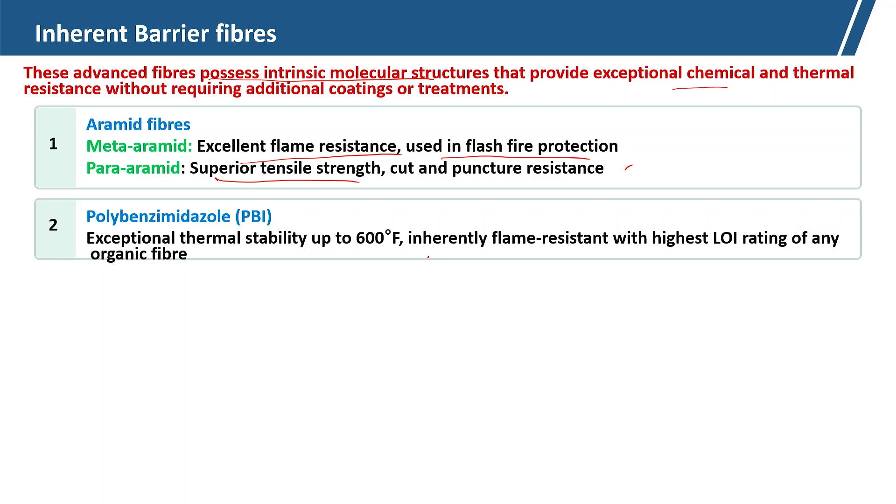PBI fiber has exceptional thermal stability, inherently flame resistant with highest LOI. Polyimide fiber has outstanding heat resistance and chemical stability. PTFE fiber is chemically inert to virtually all industrial chemicals - very important for chemical resistant protective textiles, and it has excellent performance in corrosive environments.

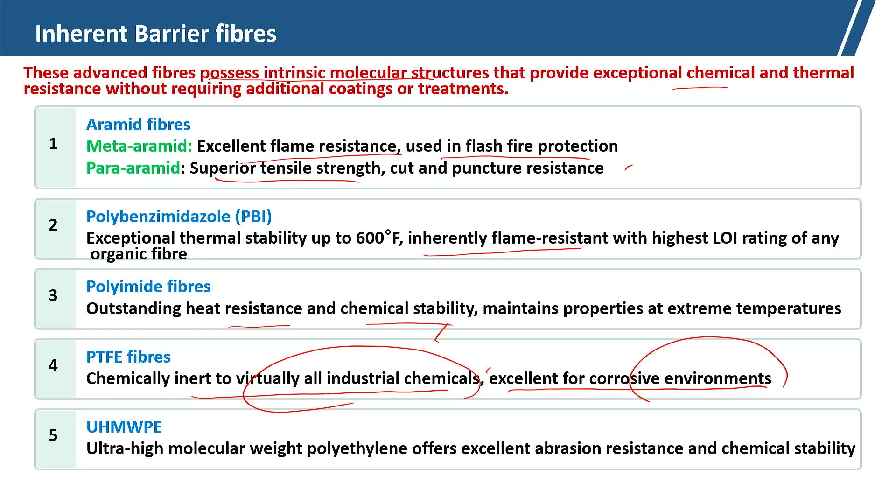In any corrosive environment it is protective, and ultra high molecular weight polyethylene - these are used for mechanical protection as well as chemical protection, due to its high chemical stability we can use these fibers for chemical protective textiles.

Next is coated and laminated barrier materials - we will discuss this and other aspects of gas and chemical protective textiles in the next session. Till then, thank you.